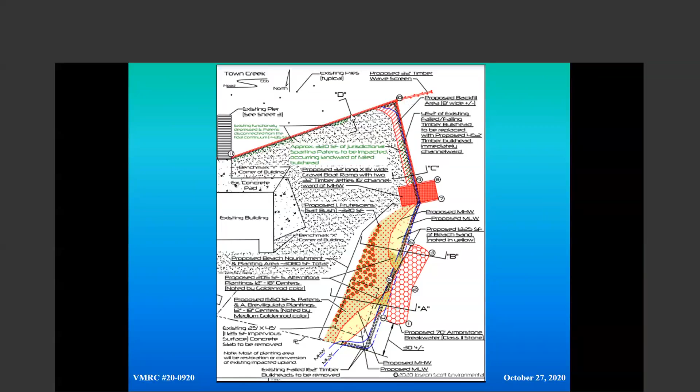The pier you see to the furthest right is to be rebuilt, essentially repaired. It's about the only pier on the facility that's currently serviceable.

The bulkhead will continue west from point 11 to point 12 and take a turn to point 13, somewhat to the southwest. All of that area will be new timber replacement bulkhead in front of the old failed bulkhead, with backfill behind the new bulkhead. Two new piers will be installed in the general footprint of old failed structures, in the same location.

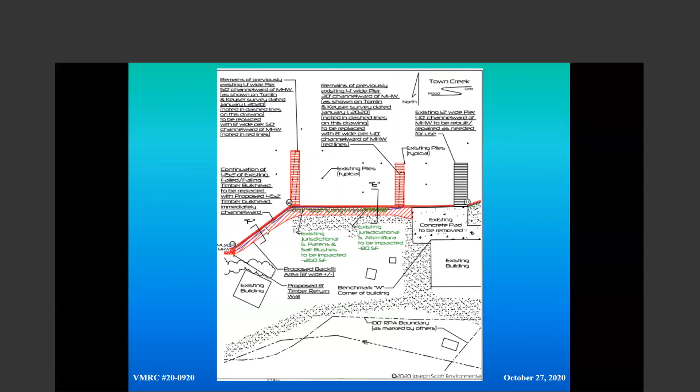Point 13 is the transition from timber replacement bulkhead, and as we go west up into Town Creek, it will transition into a riprap revetment all the way to the end at point 17.

Next slide. What we'll do now is go to the section view of those same aspects of the project, starting with section A and B, representing the proposed concrete rubble and quarry stone on top breakwater with proposed backfill, sand, clean sand fill, and plantings.

All of the upland remnants of the bulkhead and failed concrete pad and debris and rubble will be removed. This will be a living shoreline, if you will, area of breakwater and sand beach on the southeasternmost corner, adjacent to the APOs Mancuso and Vining.

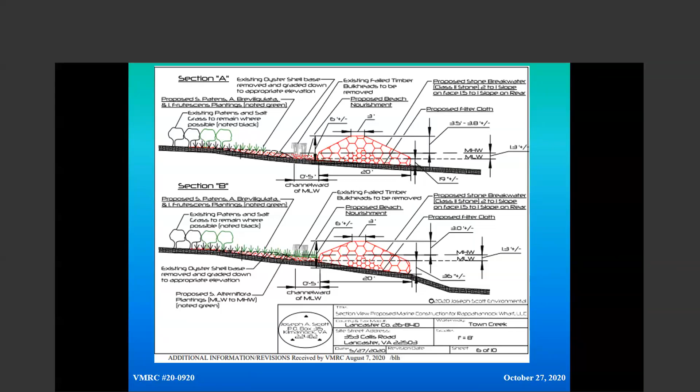The elevation of the bulkhead will be raised somewhat with additional backfill, cleaning out all of the debris and associated former failed structures, to get the upland back into an area that can be used for the applicant's construction facility. Next slide, please.

Additional section views where the bulkhead's a little bit lower. This is section E and F, as we've turned the corner and have gone more into the north-facing shoreline inside Town Creek. Next slide, please.

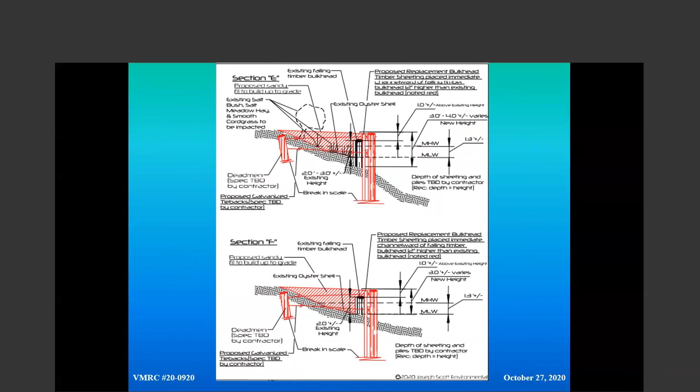This is the boat ramp section in the top section view drawing, which shows how quickly the water drops off in this location. The boat ramp will be constructed over the existing substrate, with flanking timber jetties. They're more jetties than groins given their elevation, but these two structures flanking the boat ramp will be there to protect the ramp and ensure it doesn't fill in with sediment, reducing the maintenance required from sand filling in from where the breakwater is to the south.

The timber wave screen is in the lower part of the drawing. It's a continuous height structure, about 4 feet above the elevation of mean high water, to break down wave energy as it comes in from the east off of the main stem of the Corrotoman and wraps around into Town Creek, protecting the boat basin area where his barges and skiffs will be loading and unloading equipment.

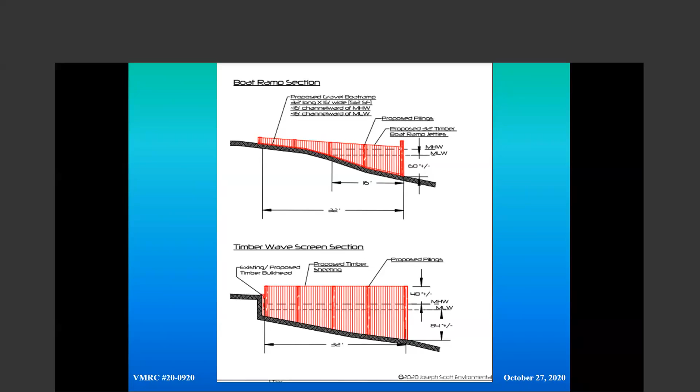This is the riprap that's proposed, above the mean low water line. It's already been approved by the local wetlands board, as have all of the other aspects of the intertidal impacts of the project. Those were approved at the Lancaster County Wetlands Board public hearing some time ago. This will show the riprap tucked up right against the steep wooded vegetated bank, with a standard buried toe and filter cloth. The bottom picture is just a vicinity map.

Now we're going to go to some, next slide please—now we're going to go to some ground shots.

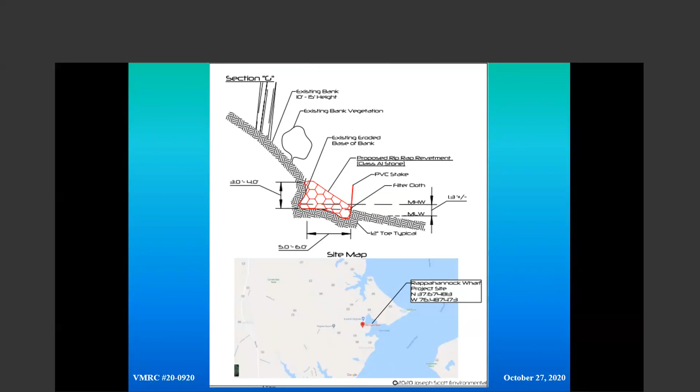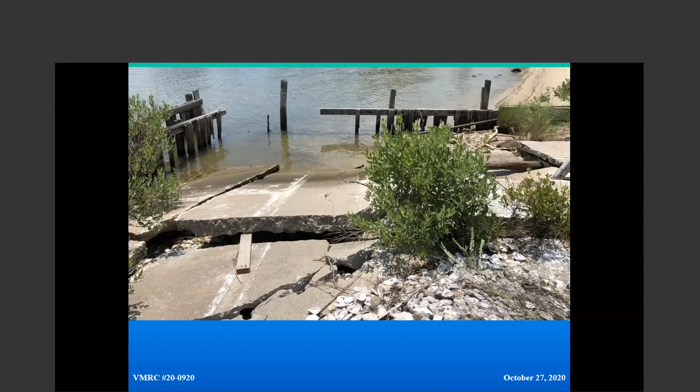Now I am looking back toward where the breakwaters will be. If you note to the left of the old timber wall, there are some white PVC pipes. Those represent the footprint of the breakwater.

So that area will actually be on subtidal bottom, the quarrystone and rubble material breakwater with the sand back behind it. And then as you transition more to where I'm standing, all of this would be removed and the new ramp would be installed about where I'm standing, I believe.

Again, all the material is to be removed. You can get an idea how quickly the water depth drops off to the left there. It's relatively clear water that day.

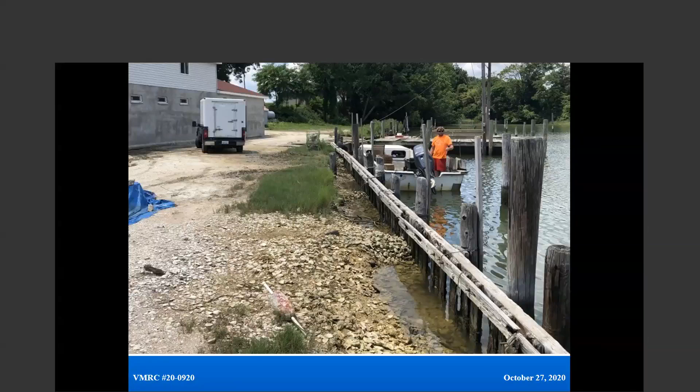Again, the somewhat serviceable old pier will be repaired or replaced as necessary here. The revetment would continue off to the left, to the west. The pilings you see offshore are the remnants of the old piers and mooring piles. All of that's to come out, and there will be new piers installed in the footprint of the old.

While I've got this slide, the house you see to the left, I believe, is the Morazes, if I'm pronouncing it properly. And the house you see more to the right is Mr. Emery's, who represents Town Creek LLC, both of whom are in opposition to the project.

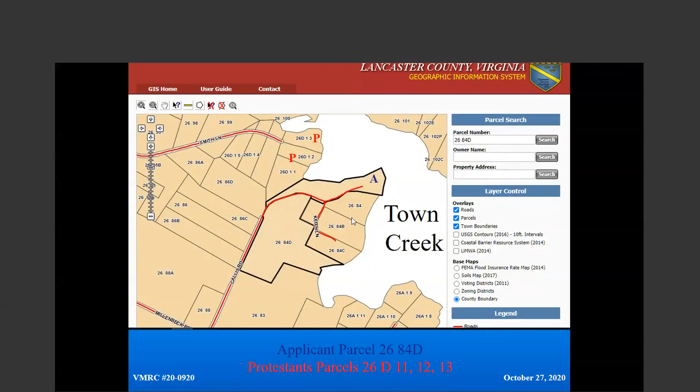the entire parcel, as was done by his father. It would offer more protection for Mr. Davis and his business, but he does not object to the physical encroachment onto his oyster lease resulting from the proposal. Next slide, please.

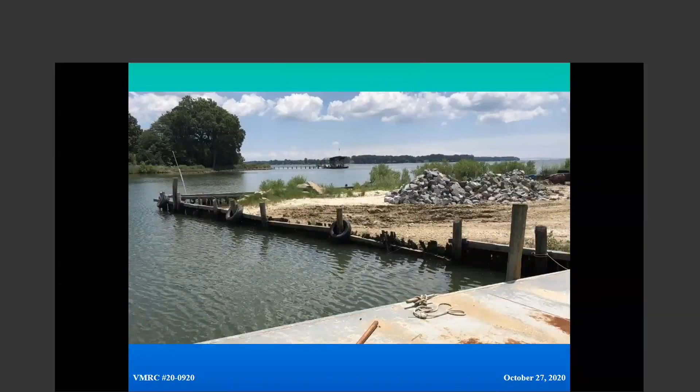One more maybe? If this is the area you're speaking of, there you go, that works.

The water depth drops off pretty dramatically to the east of that easternmost failed structure, and it is my understanding that the applicant's desire is to use this upland area, this corner, and restore it to an upland area that can be used for his business. To build a sill here, it's real deep to the east, unless you built the sill right along the alignment of the failed structures. But a sill and a living shoreline here would obviously take away from what his plans were for the property and what the property was traditionally.

If I can at this point, Jay, I need to ask you a couple questions. I'm looking at the first paragraph, and it states that the owner is Frankie Davis, owner of Northern Neck Marine Construction. I need the answer to these questions. Is that the name of the business that's currently there? My understanding is the parcel was for sale for many years, and Frankie Davis runs Northern Neck Marine Construction, and he and his wife are now the owners of the parcel.

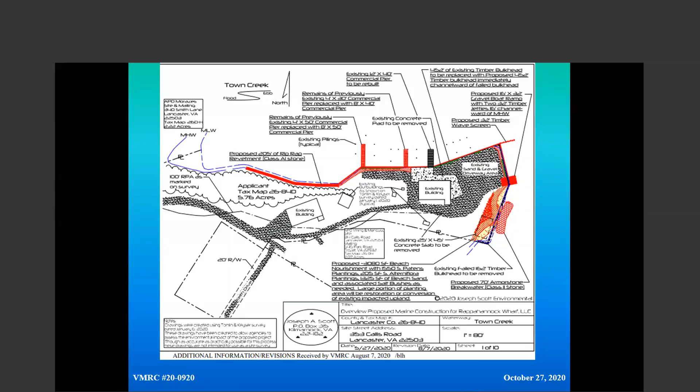I've got a list of folks that want to speak. I guess the best thing to do is go to Mr. and Mrs. Bob Mraz first, since they seem to be the adjoining property owner. Then I have Brian Peoples, attorney for adjacent property owners Mancuso and Vining, and also a Mr. Bill Emery. At this time I'll get the folks that are closest impacted, which would be the Morazes, to address the commission if they would like to.

Are y'all on the phone? Yes, I'm on the speakerphone or on the computer. Can you hear me? Hear you very well. Is this Mr. Bob Mraz? Do you solemnly swear the testimony you give today will be the truth, the whole truth, and nothing but the truth, so help you God? I do.

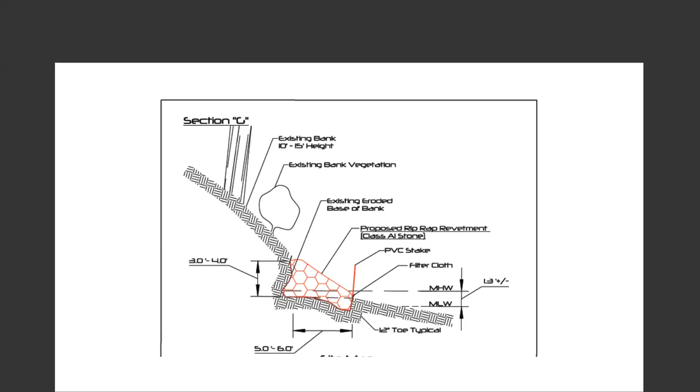If you go back to the stonework, to picture number 2, there's a lot of trees in the area that will be impacted. One is already in the water line below the stake, and there are two you can see, plus several more along the beach line, some in the water. They provide a nice environment for the herons and fish. There's an old dead pine tree, hard to see but way up high, that provides a good hunting perch for bald eagles, ospreys, and herons.

That's tree acreage that's going to be removed, and I don't really see how they think they can do all that work down there without disturbing any of it.

This is one of the other pictures. You can see the stake line, and there's an awful lot of trees really close to it. I think a lot of vegetation is going to be torn down to put that in.

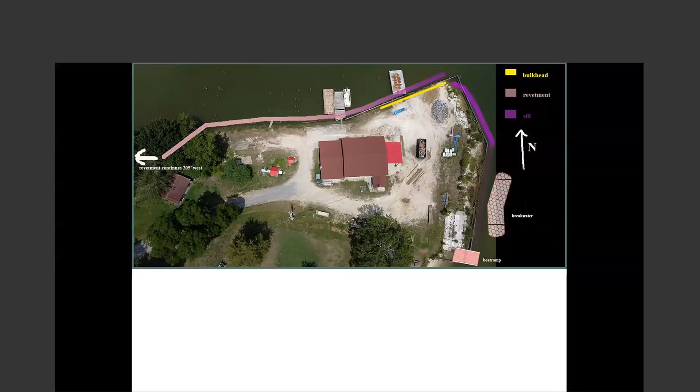Next slide, please, Mike. With incorporation of the VIMS and NOAA recommendations, oops, thank you so much. With incorporation of the VIMS and NOAA recommendations, this project has great potential.

However, as presently designed, the project fails to meet the bar set by Senate Bill 964 from 2011, and fails to meet permit condition E, which we've heard before today: the permittees shall, to the greatest extent practicable, minimize the adverse effects of the project upon adjacent properties and wetlands and upon the natural resources of the Commonwealth, end quote.

Presumably, the issuance of a permit would require several actions from the Wetlands Board. At a minimum, the Wetlands Board would consider materials they receive from the scientists. They would consider input from the public at their public hearing. They would hear from staff and the applicant. After discussion and deliberation, they would vote on the permit, providing a rationale for their decision. Slide, please.

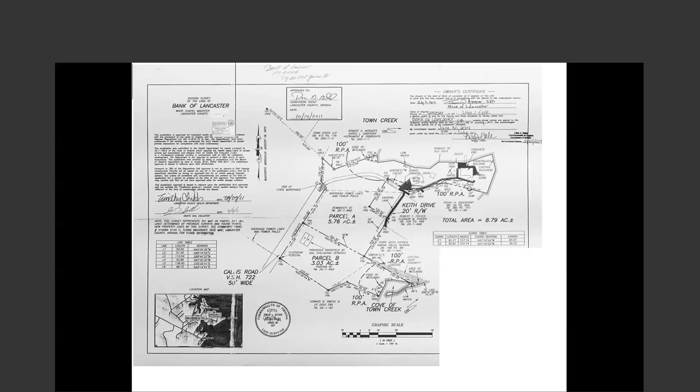I hope you will agree we can do better on this project. We can do better by today remanding this matter back to the Wetlands Board for a database second look, a fulsome study of the intertidal impacts based on a current survey, as was done in Accomack County in JPA 200808 last month. With time, with guidance from this commission, and with the incorporation of advice from VIMS and NOAA, will come a redesign and a resubmission.

I do have just one or two other comments regarding the tree line along the revetment. We were shown slides from '59 and 1965, and they make me wonder, what is the erosion rate in there? The fetch there is categorized by VIMS as very low. The tree line, if it's not eroding, why take out a whole riparian buffer so you can put some stone at the bottom? It just seems like a bad idea.

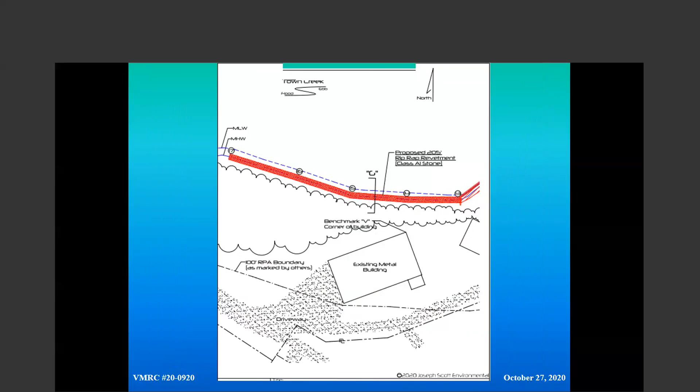We had usage we were trying to stick with in terms of the bulkhead on the other side, being able to marginally moor a boat or vessel and have a machine go up to the edge and be able to load it.

Redneck Marine Construction does living shorelines. They're one of the few guys around who actually do them from a barge, which is actually preferred, because a lot of times you have to destroy the RPA to build a living shoreline and then go back and replant the RPA. So we were trying to work within the constraints of the site and the functionality he was after.

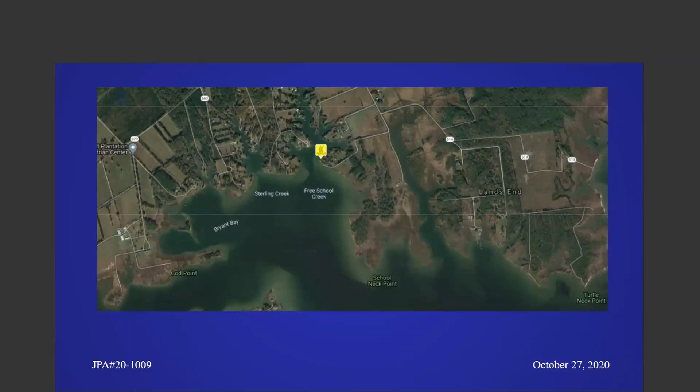In the slide, you can see the project area highlighted in yellow. This project is located at the mouth of Free School Creek, a tributary to the Severn River in Mobjack Bay in Gloucester County. Here's a look at the project area, again with the proposed work area highlighted by the yellow marker.

The applicant wants to replace the pier, as it was accidentally removed by the contractor when they started work on the boathouse. It was not proposed to be replaced in the application for the boathouse, and the justification for the pier replacement is to moor a sailboat owned by the applicant.

There's a second pier on the property on the south-facing shoreline, right about here. This pier in its current configuration meets the exemption requirements in the Code of Virginia, and staff has discussed having this pier enlarged to accommodate the applicant's needs for mooring a sailboat. But due to the fetch, and since the proposed location for the pier is also protected by the rock sill in this area, the applicant would rather replace the pier he had.

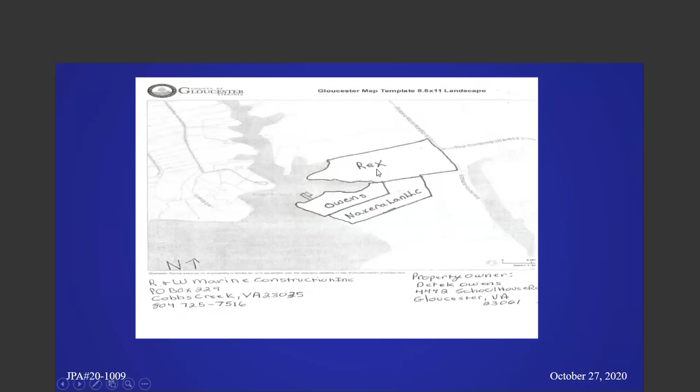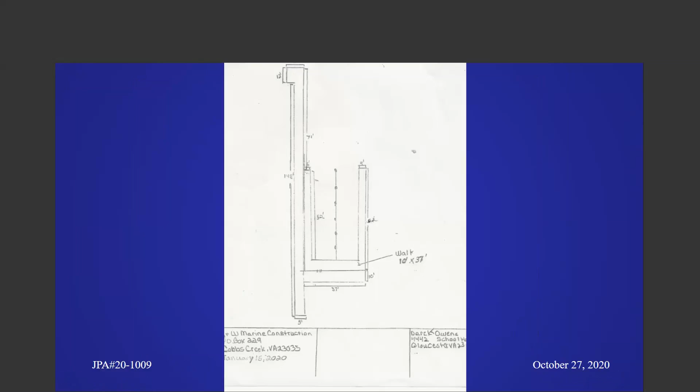Here's a plan showing the previously authorized boathouse dimensions and the proposed pier, a 148-foot long pier with a 10-foot by 12-foot deck.

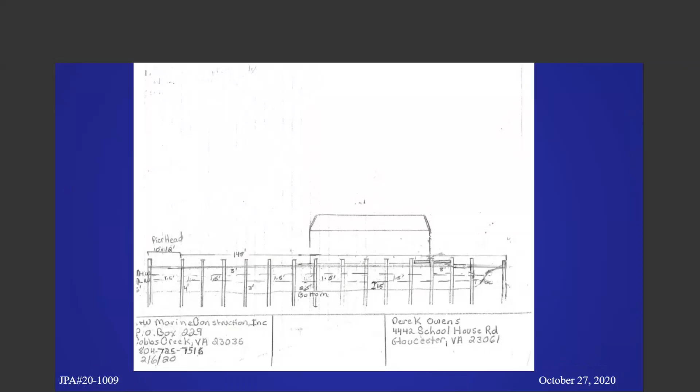This is a cross-section showing the water depths along the pier. At the end of the pier, where the pier head is located, we have about -6 feet mean low water, which would facilitate the mooring of the sailboat. Finally, we have a benchmark showing the distance from the rock sill, showing there will be no impact to navigation between the pier and the rock sill.

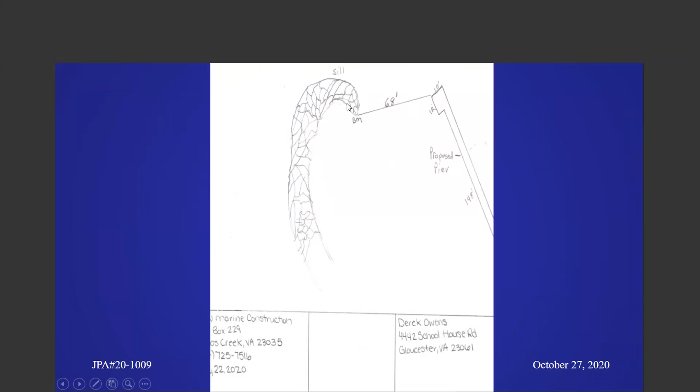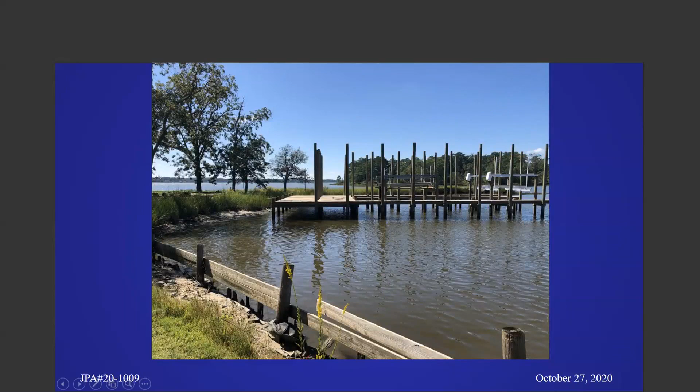Angle showing the deck space and the boathouse pilings that have been driven. Another angle, turning to the right a little, you can see the end of the boathouse here. The pilings you see out in the water were actually left over from the original pier, just so they could get the alignment correct on the new pier. This would be the channelward terminus of the new pier as well.

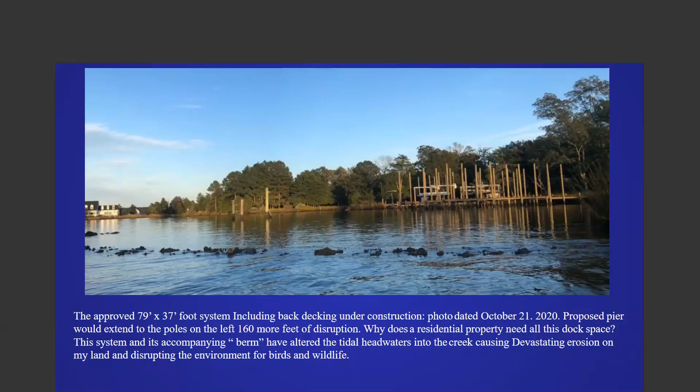Thank you. That is my position, and I invite your questions and clarifications. There are a few other pictures — I'm sorry, could we go back to the pictures one moment?

This picture shows where the pier is currently lying in wait to be attached. But looking at this picture of the boathouse from 2015, those pilings are not there. There's this one piling way out here, but the pilings you see now were not there in 2015, before changes were made to the property.

Could we go back to the pictures that show the sill? This is a picture of the sill coming out from their property, making a huge crescent. Over here you can see my gazebo, which was visible in the pictures showing the erosion, and back here you can see my house.

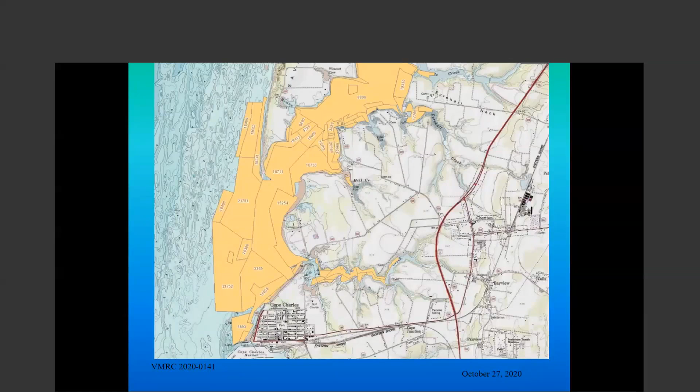Here's an aerial photo of the area with the oyster ground leases shown. The little marsh icon represents the approximate location of the float application. You can see the SAV area shown to the south. Again, the protestant's property is to the east and north of Mill Creek, the small creek where the SAV runs into, and you can see a lease goes up into the upper part of Mill Creek. Next slide.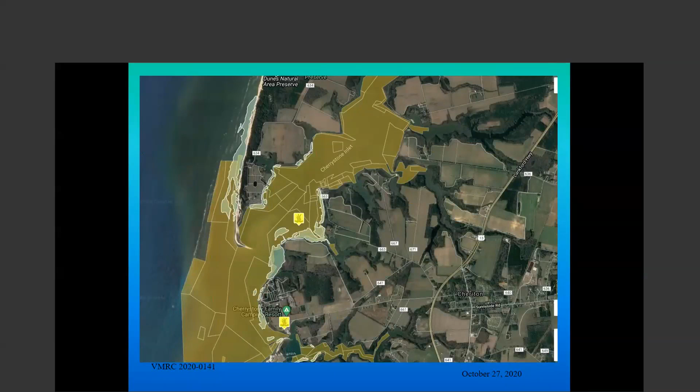After the public interest review and notifying adjacent property owners, we received a letter of objection from Judith O. Switston, listed as Vice President of Tidewater Realty and Security Corporation, back in March. In that letter, she noted the application appeared to reference an incorrect lease as the project location. Additionally, she believed the project as proposed may interfere with navigation to and from Mill Creek, a tributary to Cherrystone Creek. She also noted the area should remain in its current state for recreational use, and that floating cages would create an eyesore to the immediately adjacent property owned by Tidewater Realty and Security Corporation, and could also create odor issues. She noted that Tidewater Realty and Security Corporation has been consistent in the past in objecting to similar activities in the creek.

Subsequent to that, the applicant submitted revised information to correct some errors in the original application. The original application, shown here, did not impact any SAV beds as proposed.

Staff also understands that the applicant, in the interim since February or March, has been in contact with Dr. Catherine Fulton, who is also a principal and owner of the Tidewater Realty and Security Corporation property to the east, concerning the proposal. We believe there's been ongoing negotiations between the applicant and Dr. Fulton, which may have resulted in a revised modification submitted in March that would move the application slightly to the west in an attempt to avoid impacts to Mill Creek.

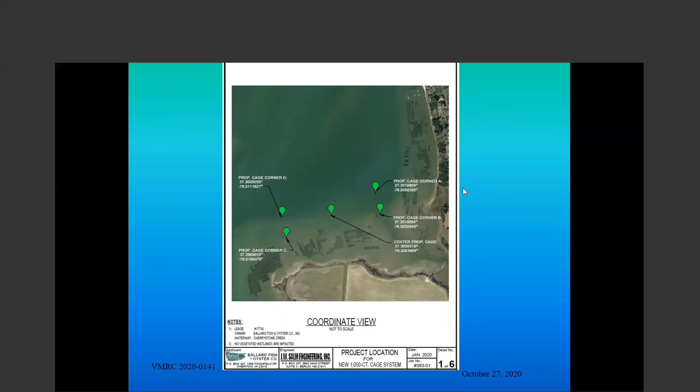This is the drawing that was also provided with the application, just depicting the rectangular area of the original January proposal.

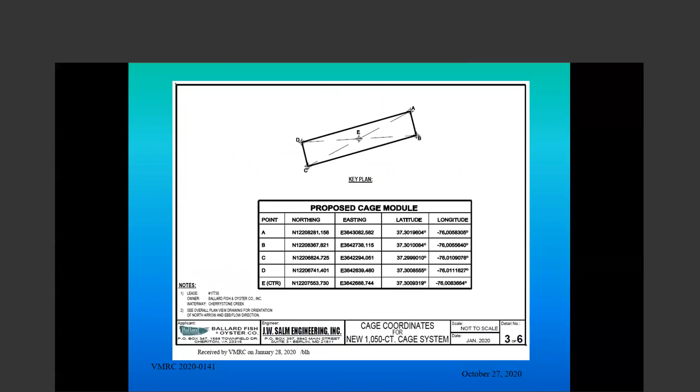This is just the coordinate values of that same box.

These are the other drawings submitted, typical layout for the proposed floating aquaculture structures. They would be anchored on the ends with screw type anchors, and as you can see, it'd be up to 15 rows.

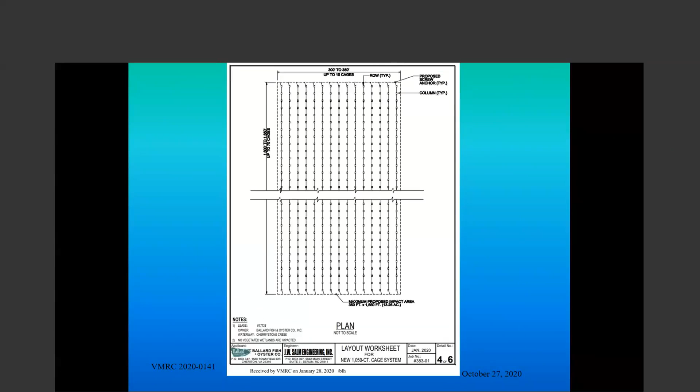This is typical of just what the individual cages would look like, again tethered at each end with screw anchors and floating cages.

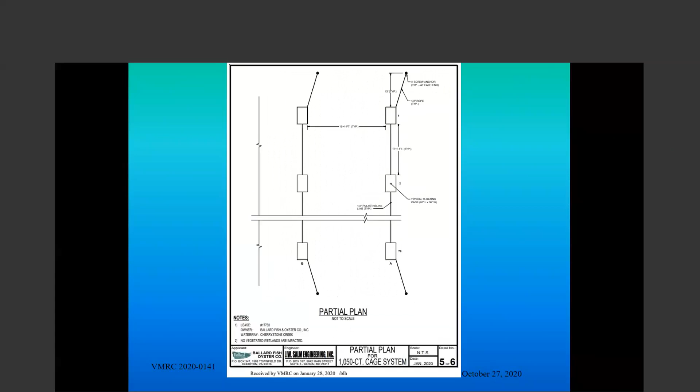One more typical of the actual system would look like. Again, the cage is underwater, the float system on the top. These are designed so they could be sunk if necessary for bad weather, but typically they would float on the surface, as you see here.

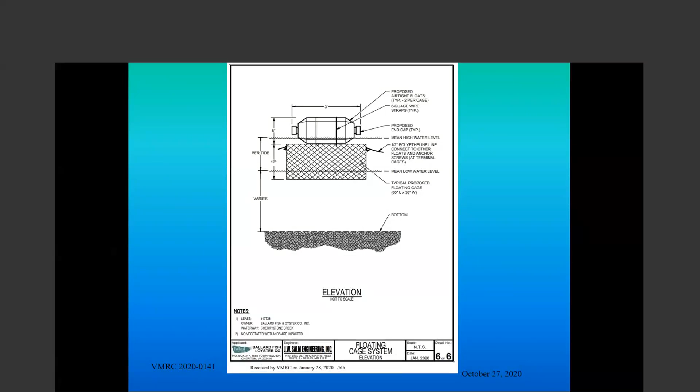So the use of cages and floats, nets in shellfish propagation has resulted in increased public awareness concerning the use of public bottoms and highlighted the necessity for a comprehensive review of such requests related to aquaculture.

Such requests in populated areas raise issues regarding public trust lands, including user conflicts, property values, aesthetics, navigation impacts, and suitable bottom types. Stewardship of public trust lands while weighing public and private benefits versus detriments requires a multifaceted review of such permit requests.

Staff evaluates all protested applications on a case-by-case basis, considering all comments received concerning the area under request. So the total footprint of the original request was 1,650 by 350 feet, which would have been approximately 13.26 acres.

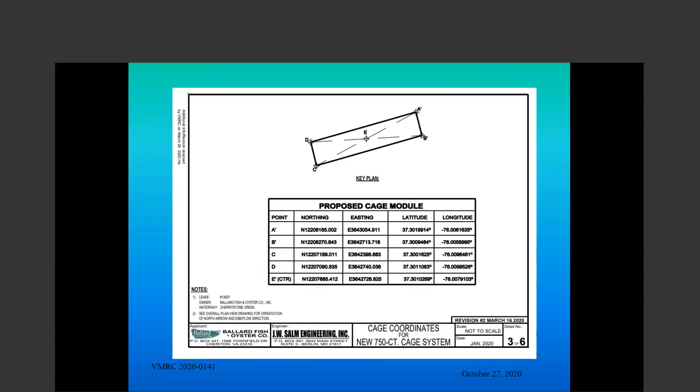In September, the applicants sent an additional set of drawings to Dr. Fulton, moving this area even further to the west, approximately 290 feet from the channel or from the original proposal on the eastern side. Staff was copied on this email, but the drawings were not officially submitted as a modification request. We believe this was an attempt by the applicant to address Dr. Fulton's concerns, hoping that moving the site slightly more to the west would alleviate her concerns. This revised area would have been 350 feet by 910 feet, about 7.31 acres. This also represents a further reduction in the size of the original request, and the number of floats was reduced down to 750.

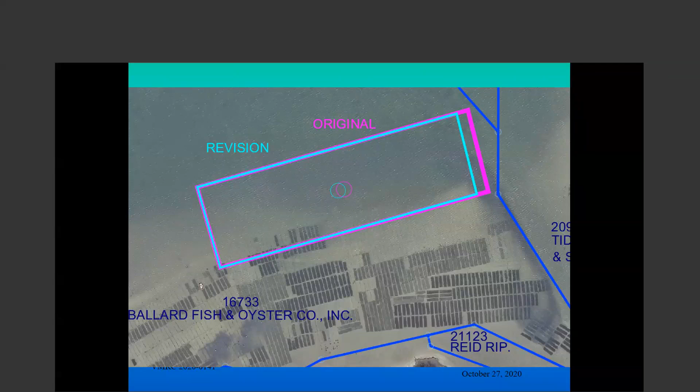This is a representation of the 290-foot shift that was presented to Dr. Fulton. We did see this confirmed by copy of an email.

This is a graphic representation of that same area on a map that was provided to Dr. Fulton. And this was the most recent map sent to Dr. Fulton.

She questioned where all the other floating permitted structures were. There is a permitted, authorized floating permit for the smaller rectangle you see there, which is north of the most recent September modification proffered to Dr. Fulton, and there are floats on that site. Dr. Fulton sent me pictures of those and wanted to know the permit number, which I provided. There seems to be an anomaly on our website where that particular permit does not show up when you load the map and ask to see all the joint permit applications. I'm still investigating why that occurred, but in any event we did provide her with that information.

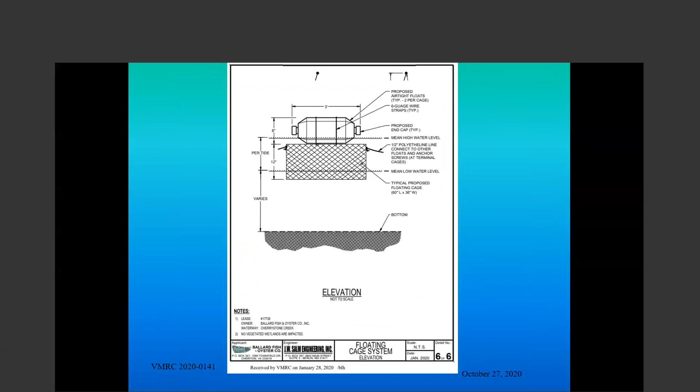Okay, is anyone else here in support of this application who wishes to be heard? Is there anyone in opposition who wishes to be heard? I haven't been informed, but a gentleman by the name of Reed Mayo, attorney, wishes to represent both Catherine Fulton and Judith Swiston. If I'm wrong, I can be corrected, it won't be the first time for sure, but is Mr. Reed Mayo on the phone? I am, Mr. Commissioner, can you hear me? I can, Mr. Mayo, I'm not familiar with you. Are you an attorney licensed to practice in the Commonwealth of Virginia? I am, Mr. Commissioner. Okay, sir, I will not swear you.

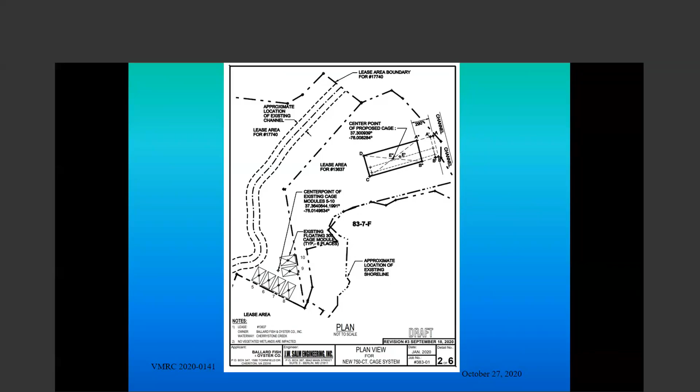Is that different than what I'm looking at on the screen right now? Yes, I have a drawing that would reflect what they just asked for. Okay, can you put the drawing up? Go to the next slide, Mike. I want to make sure Mr. Mayo sees this. Next one. Keep going. One more.

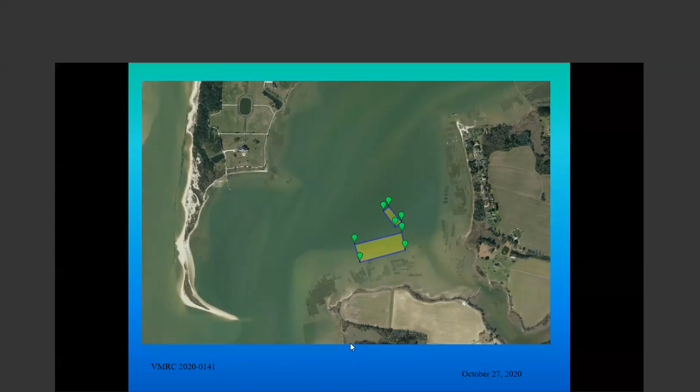Okay, so this is the drawing, and I'll explain this so you understand it. Based on what they just asked for, the box at the top slide with the 4 icons is the area of the most recent revision in September. If you add 150 feet to that box, that would be the smaller rectangle to the south. Those distances show the distance offshore, and the reason for those is there is SAV along the shoreline. The bottom drawing I could not combine with the top because the mapping system uses 2 different maps, but I put distances on the SAV map that are generally in the same location as the 3 distances on the aerial map. You can see that the box, if extended another 150 feet inshore, would still be offshore of all of the current SAV bed.

Now, that's 2018 data. I did look at the composite, 2014 through 2018 plus 2019, and 2018 is the year SAV extended the farthest offshore of any of those years. So this is the worst case, or best case, scenario for SAV. This box would not encroach into any of that shown SAV bed or any of the last 5 running years. I believe, and you may want to ask the applicant, that this represents what they just requested, which was an additional 150 feet inshore.

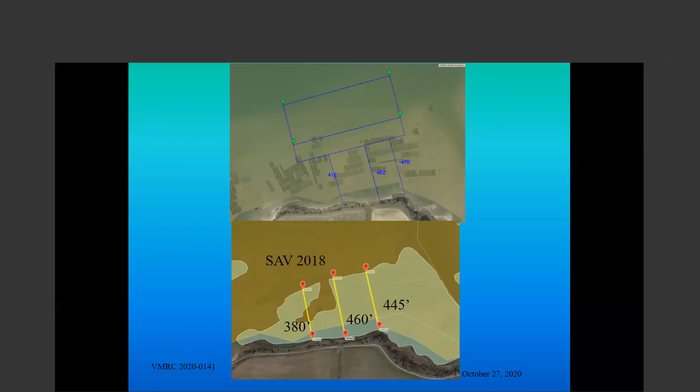Next item on the agenda is public comment. This is an opportunity for anyone in the audience who wishes to be heard on matters that are not on the agenda at the present time. If staff would open up the mic to see if anybody wishes to be heard. I see something down in the chat block.

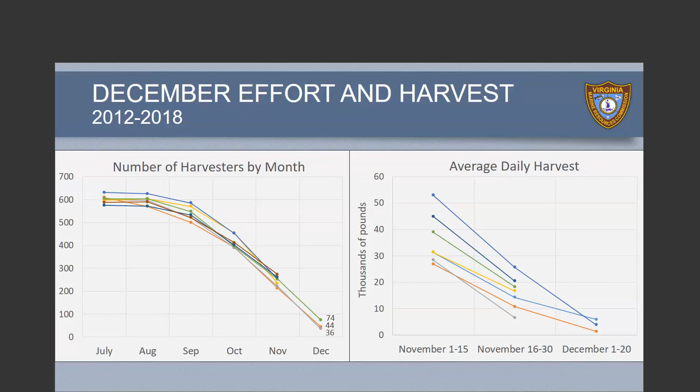So in December of those 3 years, the daily number of trips averaged 14 trips per day, and in the highest year, an average of 20 trips per day. The daily harvest from 2012, 2013, and 2016 was around 5,000 pounds per day, and in the highest year, 2012, it was around 9,200 pounds per day.

So if we take those average daily harvests over the 19 days proposed for 2020, using the average, we could estimate 95,000 pounds of harvest, which is about 0.35% of 2019's harvest. And if we use the highest December, 2020 could harvest up to 175,000 pounds, which would be 0.65% of the 2019 harvest.

Now to go through the regulation 270. In section 30, subsection C, we just add December to the lawful time period, daily time period.